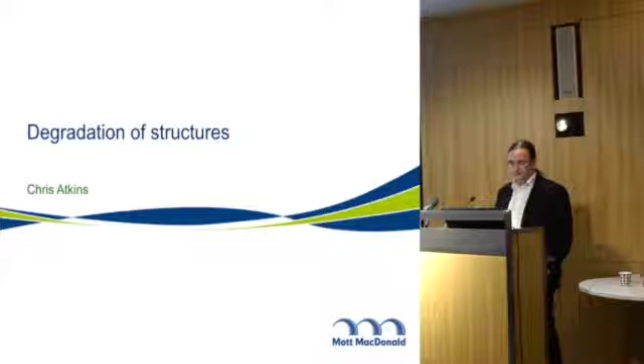First thing to know, concrete is a great material. Structurally it works, it's durable, it can last a long time, you get the impression that nothing really goes wrong with it. Wonderful stuff, but functionally it cracks. Structurally it has to, that's how it transfers load into the steel. We know bits can fall off because that's why I have a job.

It can also be attacked by chemicals. We think of it as an inert lump, but to be honest, it's alkaline, and when you chuck acid stuff on anything alkaline, it reacts. There's a couple of other things that can happen too. And the commonest thing I have to deal with, we put steel in it to cope with the cracks, but the steel rusts.

To carry the loads in concrete, it cracks. A lot of the early reinforcement designs we have are basically there to control the size and spacing of the cracks. That's kind of what they're there for.

Typical design code used to be make the cracks less than 0.4 millimetres in width. Wonderful. If you want a water retaining structure, you make the crack less than 0.2 millimetres width. The Euro codes have changed all that, so there's a whole range of other things you have to consider, but that kind of worked for a very long time.

The other thing concrete does is crack where you don't want it to. We come across designs that have come up with spacings for joints that are rigorously applied, and we'll have the joint here, here and here, and then they get confused when it cracks somewhere else. You don't tell the concrete where it's going to crack, the concrete will crack where it's going to crack. So they might not happen where you expect them to happen.

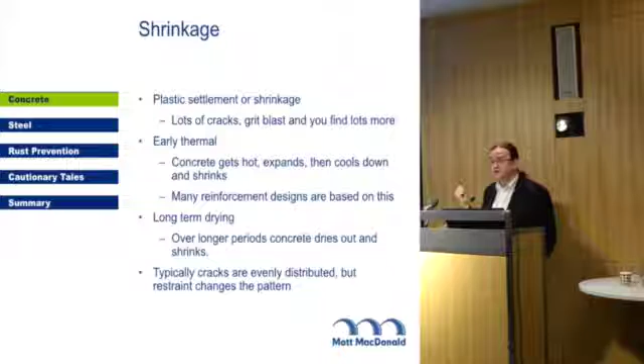If you come across cracks on site on a fairly freshly poured piece of concrete, first thing to do, give it a light grit blasting, because then you'll actually realise the true extent of the cracks. If you can see one or two, there's probably hundreds of them. So before you set out fixing hundreds of cracks by a method you thought would be cheap and simple and just involve injecting one, grit blast it. Find out how many cracks there are.

Early thermal cracking is cracking due to early thermal effects. Basically, concrete going hard, chemical reaction, gives off heat. So it gets hot and expands. Then it goes hard and cools. And as it cools, it shrinks. And as it shrinks, it gets tension in it. So you get cracks. And a lot of reinforcement designs are actually based on this.

It's kind of handy when you come to fix a motorway pier, because it means, yes, you've got lots of corrosion, but structurally it's not that significant because we put a lot of steel in to cope with the fact that it was hot and then got cold.

Long-term drying shrinkage is shrinkage that occurs over long term due to drying. Basically, stick concrete in an environment, it'll dry out and reach an equilibrium with the surrounding area. If the humidity around it is low, it'll shrink a bit more than the UK.

Typically the cracks will be nice and evenly distributed, because it happens uniformly over the structure. But if it's fixed in one place because there's a lift shaft there or there's a corner of a slab it's tied into, it's going to change it around a bit.

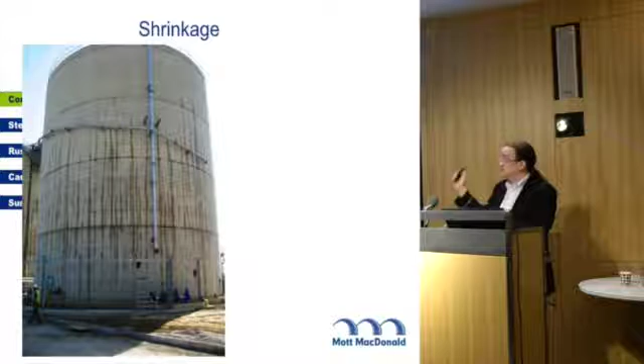In this case, concrete occasionally does a very useful thing called autogenous healing. The cracks self-heal with a bit of time. We measured them all, they were all in requirements with the design code. The autogenous healing basically filled them up, and after a couple of months with water sat in it, it stopped leaking.

So they divided it into nice 35 metre lumps, putting a joint every 35 metres, which meant that the extra 0.15 theoretically is a free floating corner of the building and a free floating edge. It's not going to work like that. There's no way on earth that that is going to be a separate piece of concrete behaving independently to the rest of the building, and that joint is going to move 75 millimetres in 3 dimensions. So you need to have a bit of a think when you're doing things.

In this particular structure, they had joints running up the middle of columns with reinforcement links going across the joints, and it's not going to move like that. So don't forget, trying to design the joints to cope with the middle of a column suddenly moving 75 millimetres out isn't going to happen. You need to have a bit of a think.

Plastic settlement - basically concrete settles down when it's wet. You can spot where all the reinforcement is. Durability-wise, that might be a problem.

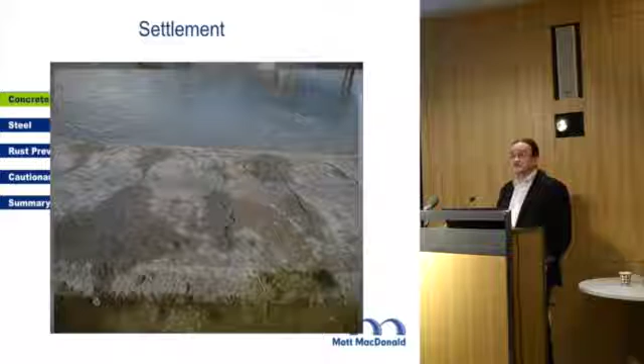This is a structure up in Scotland, a water retaining structure, and you've got the same kind of thing. The bars are basically immediately underneath the cracks, which means the bars aren't in nice friendly concrete anymore - they're basically in the water that's collecting in the cracks. So they're probably going to give you a corrosion problem, and you need to do something about them.

For chemical attack, it's either chemicals on the outside going in, or chemicals on the inside kind of mucking up the concrete anyway. Concrete's alkaline, so acid attacks it. Concrete's got a load of calcium in it, so soft water attacks it - soft water likes having more calcium in than it's got. The one we worry about for concrete in the ground is sulphate attack.

Internally - civil engineering naming terms again - alkali aggregate reaction is a reaction between the alkali in the cement and the aggregate. It can be called alkali silica reaction if you've got silica aggregate, or alkali carbonate reaction if you've got carbonate aggregate. Delayed Ettringite formation is a delay in the formation of Ettringite. So again, we're showing our commitment to innovative names.

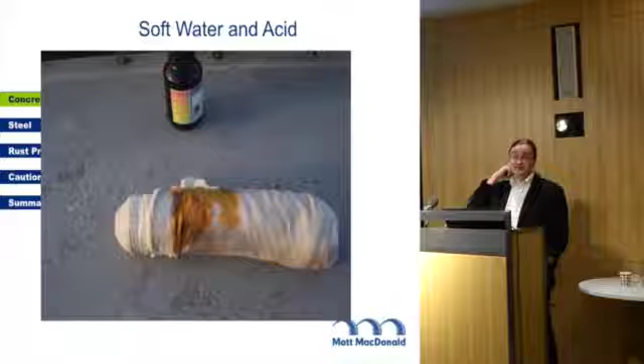That's a GRP lid. What that does - the smell in sewage is hydrogen sulfide, which happens when you digest sewage. If you put a lid on the tank, the hydrogen sulfide collects on the underside of the lid. There you get oxygen-reducing, sulfur-oxidizing bacteria that react with this hydrogen sulfide and turn it into sulfuric acid of about pH 1. Net result, you lose about 10 millimetres of concrete a year. Durability-wise, that's fairly bad. In this case, it was on 110 mil wall thickness, so they get to the steel in about 3 years, and get through the entire wall in about 10, because they put a lid on it to please the neighbours.

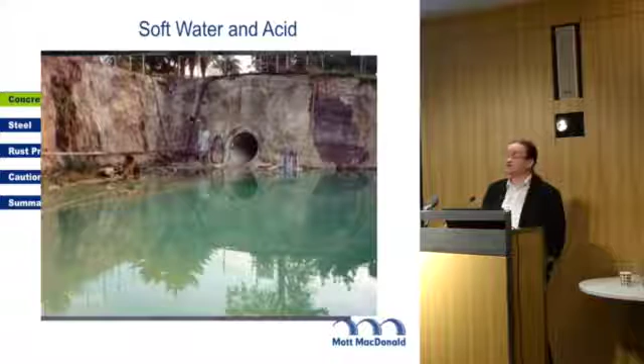Estoril interceptor sewer. If you were a public works engineer in Portugal in the 60s, you'd look at your local population, think 10,000 people living here, and design a sewage system to cope with 15,000. Then cheap flights came along and all of Northern Europe descended on Portugal for 3 months of the year because it was nice and warm and sunny. Suddenly you've got a population of 1 million pooing into a sewage system that can cope with 15,000 people. There's only one place it can go, and that's into the ground. So the groundwater for this interceptor sewer was around pH 1 due to microbial influence effects, which means the concrete sewer had to be lined with epoxy inside and out, because otherwise it would just dissolve all the concrete we put in the ground.

Alkali aggregate reaction - alkali in the cement reacts with aggregate. Typically it's silica as the aggregate that causes most problems, and that's called alkali-silica reaction. Something to note is glass is actually a reactive aggregate - if you put glass into concrete, it dissolves.

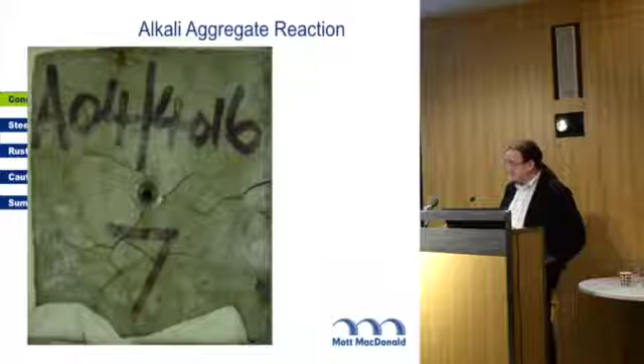If you want to make alkali-silica reaction, take some glass, stick it into concrete - that's an example the BRE did. Typically, alkali-silica reaction looks something like that, a 3-leg crack. If you've got structural restraint, it can't crack like that - that gets pushed together.

When you come along and you've got a post-tension structure, it cracks linearly. It's still alkali-silica reaction, but everybody got very confused because it didn't have 3 legs. The post-tensioning is basically compressing it, so it can't crack like that.

Delayed Ettringite formation. Sounds like I've been a bit cleverer with the name, but Ettringite is something that happens when cement gets produced, and when you cast concrete you get Ettringite. Delayed Ettringite formation is when the formation of Ettringite gets delayed. Normally this is because the mix has got too hot during the curing process. If it gets above 70 degrees C, you muck up the cement reactions a little, so it gets delayed, and you get cracks.

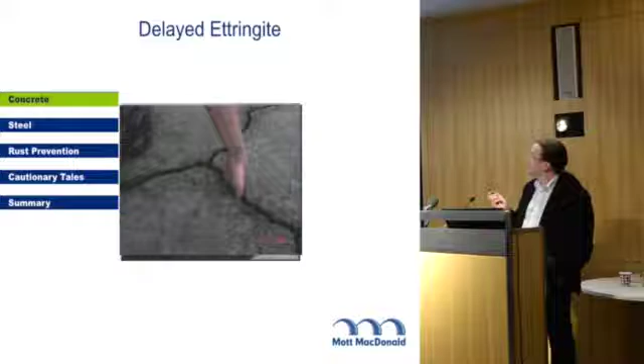That's the chemical stuff. There's also physical attack. Salt recrystalisation: salty stuff soaks in, dries out, you get a load of salt behind. More salty stuff soaks in, more water evaporates, leaves the salt behind. Eventually it just scales the surface off.

Frost basically looks very similar - the water soaks in, freezes, gets bigger, and slops the concrete off. Currently it's kind of popular; we've got more frost attack than we used to have because we had a winter that was -10 to -14 for a long period of time.

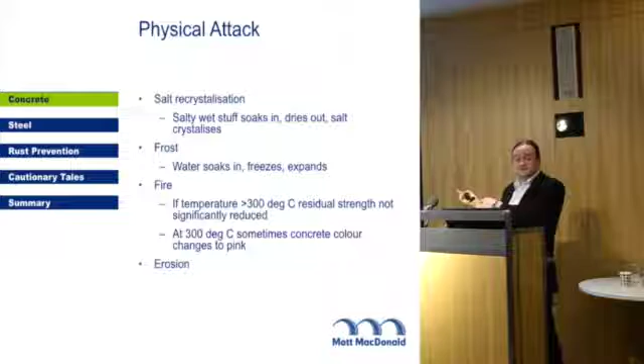Occasionally people set fire to things under concrete bridges for some reason best known to themselves. They burn cars out, and things burst into flames in the Channel Tunnel. Generally for concrete, I know it says if the temperature is greater than 300 degrees C the strength's not affected - actually that should be less than 300 degrees C.

At 300 degrees C, sometimes some concrete changes to pink. Doesn't always happen, so if you turn up at a fire damaged structure, knock a lump off, find it hasn't gone pink, it doesn't mean it's not got that hot. To be honest, if you get asked to turn up at a concrete structure that's had fire damage, it's had fire damage because that's why somebody's paying you to go.

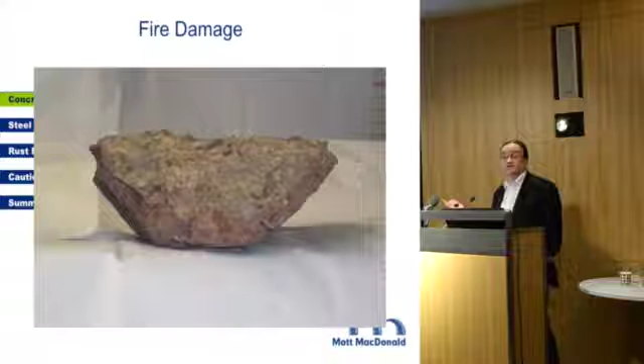Fire damage, break off a lump, go oh look, it's gone pink. But to be honest, most of the time when the concrete structure is degraded sufficiently to affect the strength, the concrete's fallen off. So then you're looking at what's gone onto the steel as well.

Typically we consider concrete to be hard and very robust and lasts forever, and if there's something wrong with it, it's because they've cast it wrong. But give yourself long enough, everything can be worn away.

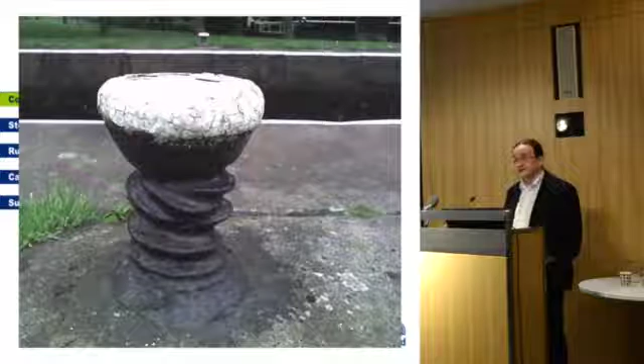And water can wear away concrete. This is a spillway in Afghanistan.

And basically, all of that is exposed reinforcement. Next bay along, again, that wasn't designed to be that shape. This is before we turned up, as you can tell by the safety hat and sandals approach to life.

There was a hole in this bit that we wanted them to investigate, so we said chuck a pole down. Couldn't find a pole, so they chucked an Afghan down. He's actually laughing his face off, because you can zoom in on the picture. He's swinging his legs around, and the report from site was he couldn't find anything to put his feet on, so it's probably quite a big hole.

That's important site feedback. Here you see some of the local aggregate that you basically have to use to make concrete.

So we turn up, we give them all PPE, so they're now much safer because they've got a hard hat on and wellies and overalls, and we try and produce a repair spec.

In this case, the client wanted the repair to be best quality. It's a bank-funded project, so we want it to be repaired to the best standards we can. We'd love to use a proper concrete repair mortar that's been certificated in accordance with the European standards.

But it's in Afghanistan and they haven't got anything. So it's going to be a case of accepting what they've got and working out a way of getting it to work. And it works perfectly well, but you can't just waltz in and say, right, we need to do this and this and this, because the skills and the equipment and the materials might not actually be available.

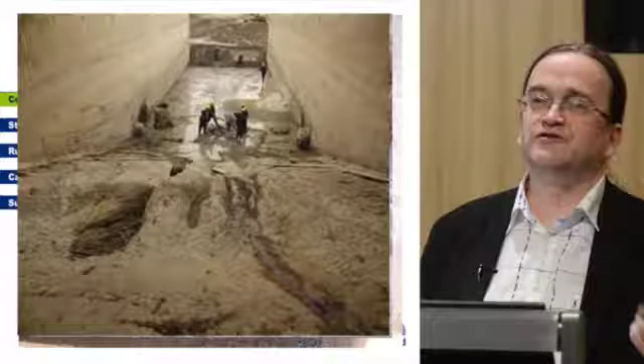Mechanical damage. It's surprising how often people drive into bridges. It really is. More commonly, people drive into parapets.

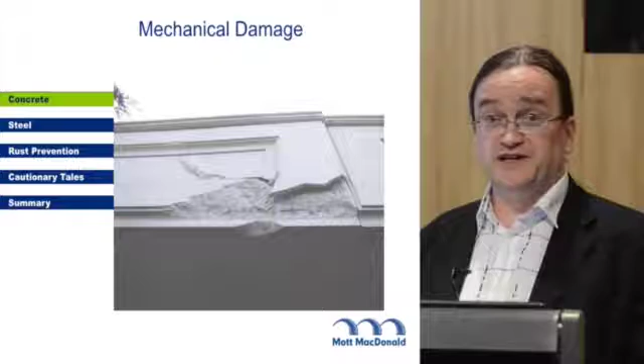For the structural engineers amongst you, this is what happens when a car hits a relatively young parapet. This is a 1990s car park, in the days when we realised that basically parapets are there not to stop people from walking off the edge, but to stop idiots from driving off the edge. The BMW that hit that suffered slightly more than the parapet did.

In the 60s, we didn't have that same approach. We thought parapets were there to stop the wind blowing through and give you some kind of edge protection. So when a relatively modern car hits a relatively old parapet, these planks, which are basically secured to the columns with 4 bolts, it's not that hard to drive straight through them.

We looked after this particular car park for 6 or 7 years, and it's quite interesting because this happens every 2 years. And based on the number of spaces in the car park, that's basically 1 in 2 million cars that goes into this place makes its own exit.

Now it's 40 quid for a morning to park there, so I can understand why, but if you're going to do it, don't do it on the 5th floor. You've a better chance of survival if you do it at a lower level. But yeah, it's a remarkably reproducible event, is people driving through the edge of car parks.

All that's well and good, but most of the time what I deal with is rust. And to understand fundamentally why things rust, you need to look at where steel comes from.

And where steel comes from, it all starts out with a big BANG, and the universe was created. Things were a bit chaotic for a while, but eventually we ended up on this lump of rock orbiting the sun 93 million miles away, and a chunk of this lump of rock is made out of brown mud.

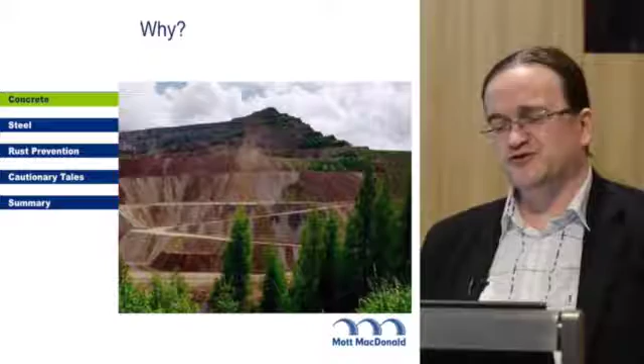Structurally, brown mud, not brilliant. You can make piles out of it, but you're kind of limited when you want to make a skyscraper out of it. You can make pyramids out of it if it's hard enough, the Egyptians did that, but you can't get many shops in the bottom of a pyramid because most of the wall is structural. So somebody realised that brown mud was good if we could stick a load of energy into it.

And as with anything, if you stick a load of energy into it, and in this case you make steel, it wants to lose the energy as quickly as it can. It wants to go back to its natural state. That's the way things work.

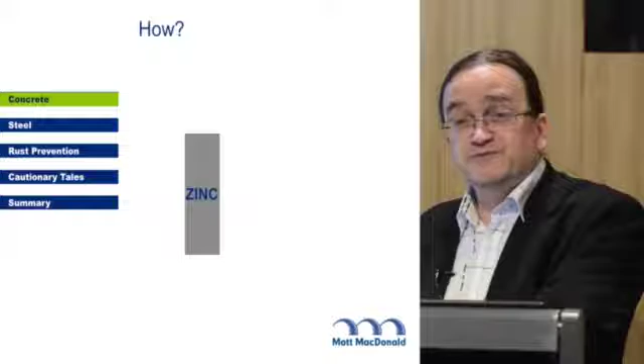How it gets there, here's where we come on to the electrochemistry. Electrochemistry, combination of physics and chemistry. Physics in school was the stuff that didn't work, chemistry is the stuff that smelled, that stank. So if you meet someone who claims to be an electrochemist, think doesn't work, smells, and you're probably not far off.

Basically, take a piece of zinc and a piece of copper, stick them in salty water, nothing happens. The zinc sits there being zinc, the copper sits there being copper. But along with zinc having a density, a tensile strength, a coefficient of thermal expansion, when you stick it in salty water, it has a voltage.

And zinc's voltage is -1. It's basically the Barry White of the voltage world. It's sitting there going, yeah baby, right down here. Copper's voltage is +0.2, so it's up here. And copper is Jimmy Somerville.

That's fine, they're quite happy like that, merrily being zinc and merrily being copper. Connect them together with a wire, the zinc sits there going, hey baby, what's all this positive stuff? And the copper sitting there going, you're far too negative. So it starts chucking negative things at that to try and bring it down, and it starts accepting negative things from that to try and bring that up.

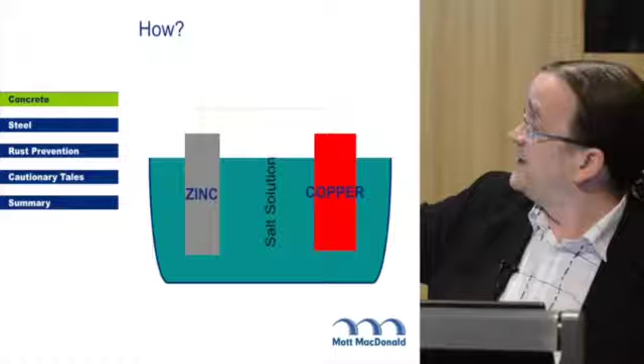The way it can throw negative things, the only negative thing it's got is an electron. The electrons, it can make that by dissolving. So it chucks electrons up there and dissolves into zinc ions in solution. That bit, electrochemically, is called an anode. The anode's the bit that loses metal. It's the one that's at a lower potential.

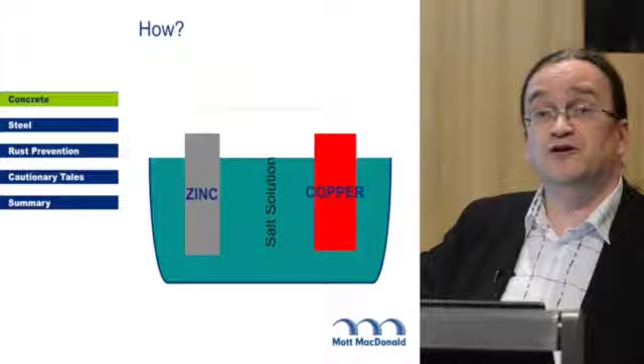The copper's the cathode, it's at a higher potential. It takes the electrons, reacts with oxygen and water, generates alkalinity, and you get electric current. That's what you get out of a battery. If you take the water away, you haven't got the potentials anymore, so you don't get corrosion. Dry things don't rust.

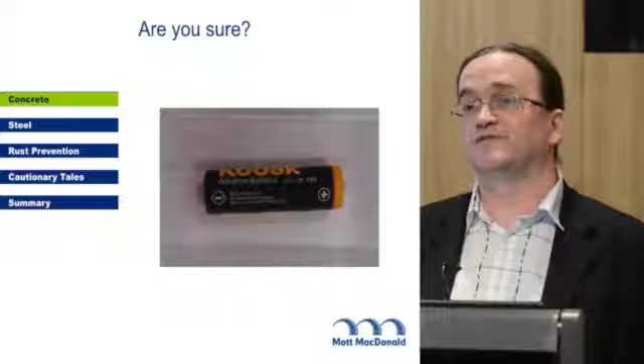That sounds all a bit, okay, I'll listen, but I'm not entirely convinced. This is a battery in a bucket on my desk with something called phenolphthalein in, and phenolphthalein goes pink when there's alkalinity being generated. So we drop that into water, and basically we can show that there was a big plume of pink came from that end, and then it starts heading towards that end. So we've got alkalinity being generated.

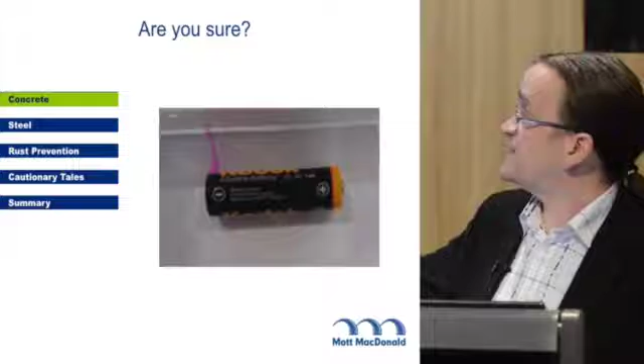Alkalinity is an ion, and the ion starts moving towards that end because that's covered in negative stuff, that's covered in positive stuff. So you get current flow through the solution. If I'd left it long enough, that end would go brown and rusty and dribbly, but to be honest, I get bored easily, so I didn't.

So steel rusts, it always will. How it gets there is anodes and cathodes. Steel in concrete, to be honest, if it always rusted, when Hennebique came along with his great, wonderful idea for a reinforced concrete system, if it all started falling to bits after about 5 years, we'd be sat there going, that was a bit daft, wasn't it?

Most of the time, steel in concrete doesn't rust because it gets this thing called a passive film on it. Yeah, we've stuck loads of energy into it, and yes, it doesn't really want to be steel, but we've given it a nice warm alkaline blanket where it sits there going, I can't be bothered changing back into rust, I'll just sit here merrily being steel. So it gets this nice thing called a passive film on it.

Two problems. Salt punches holes in its nice warm blanket and makes it rust even though it's still alkaline. Atmospheric carbon dioxide is a bit acidic, so it soaks into concrete, that carbonates the concrete. Instead of the steel being in nice cosy alkaline concrete, it's in mildly neutral tap water, so it starts to corrode.

The steel rusts, we lose reinforcement. Structurally, not great, because we put the reinforcement in for a reason. Rust is bigger than steel most of the time, so bits fall off. The bits falling off is useful. It's not great if you get hit by a bit falling off, but it means you've got an early warning sign that the steel is rusting. If bits didn't fall off, basically the steel would corrode and the structure would collapse and you would have no early warning of it. That would be bad.

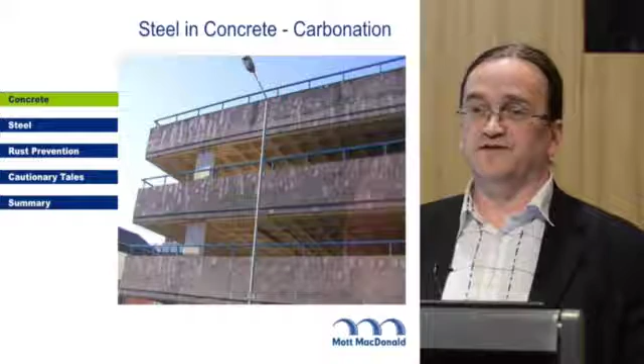Concrete's all uniform, cover's all uniform, atmosphere's all uniform, so it all carbonates at about the same rate. Every bit of steel that's in concrete that's not alkaline anymore rusts, so the repair's quite extensive but quite easy to do.

This is another car park structure, this one's in the northwest. The client knew they had a problem because bits were falling off, so they wrapped it in nets. Temporary measure, fine, nothing wrong with that. The tiny problem was they didn't do anything with the nets.

So after about 10 years, the steel carried on rusting because the nets didn't really stop that. And so rather than having bits of concrete hitting members of the public, you had nets full of concrete hitting members of the public - not entirely the solution they were after. If you do something temporary, please bear in mind it's temporary, keep an eye on it, and do something about it.

Chlorides are slightly different. Basically, a common problem in the UK: bridge beams under a joint leak, salty water gets on the crossbeam. All of that is full of salty water, but only about 10% of the steel's corroding, because that's what chlorides do - 100% of it's in chloride concrete, 10% of it's where the rust comes along.

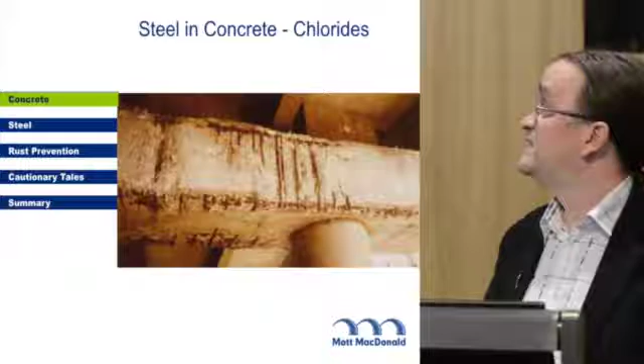Similar kind of thing, this is up in Runcorn. There's a joint above that. Basically, it's leaked throughout its entire life. That bar's probably not doing much structurally. Nice spacing of the links for anyone who's doing modern designs. We've got little architectural features to make sure we got 10mm less cover than we needed. And so the steel rusts.

Closer to this part of the world, M4 elevated. Basically, we've got a motorway dynamically carrying people into the west end of London because they're posh and need to be raised above the hoi polloi who deal with the A4, immediately next to houses. We've got half joints. Half joints made it cheap to build. From my point of view, they're great because it means they leak - all the salty water collects on that shelf and you can't inspect it and you can't see what's going on.

You just know that's probably going to be the worst bit of the structure. So from a concrete repair point of view, it's a pain in the neck to fix - a great plan for consultants to sit there and scratch their heads and wonder what to do with it.

On this one, somebody felt bad when they were building it. It's kind of like, well, okay, we've got to stick a motorway through the middle of a housing estate, but let's give them some credit - let's put the drain pipes on the inside of the column so they won't have to look at the drain pipes. And I, for one, am much happier looking at a motorway if I can't see the drain pipes immediately out the front of my house.

Drains block within about 3 months, so the concrete gets soaked from the inside out with chlorides, and we get bits falling off, and we get anodes and cathodes forming.

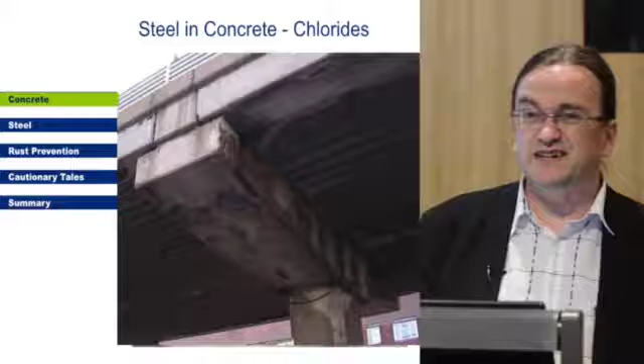Up until about 10 years ago, everybody just thought it was in situ concrete, because pre-stressed concrete gets built in a factory - it got built in a factory in the 60s and 70s, okay? For those of you who don't remember cars built in the 60s and 70s, just because they were built in a factory didn't mean you wanted to waive your RAC membership, because, to be honest, at some point you'd be on the hard shoulder of a motorway. For those too young to remember, Top Gear did an episode highlighting the quality of British cars built in the 60s and 70s.

It's built in a factory with improved quality assurance, so we're not going to have a corrosion problem - we've got higher strength steel.

Higher strength steel stops rusting normally, and you get this thing called hydrogen embrittlement, which I'll talk about more later. Here's an example of a recent repair project where we did a breakout on a pre-stressed beam and found there was a hammer that had been cast in at the factory.

So yeah, better QA needed. It turns out we started using pre-stressed concrete en masse about 20 years after reinforced concrete. For everyone under 40, when you hit about 40, that immortality of youth starts fading, you get a bit spready and things ache. That's life, and it happens to pre-stressed concrete as well as in situ.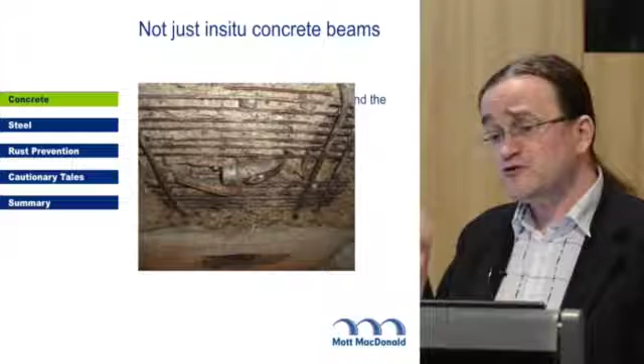But that's all right, because the Europeans have come up with a standard, including the British - we are in Europe after all. It's called BSEN 1504, and it makes the radical suggestion that step 1 is to find out what's wrong with your structure before you fix it.

That was highlighted by a study done about 10 years ago that showed 95% of attempts to repair concrete fail within 3 years. Because rather than finding out what's wrong, we see a bit of concrete falling off, turn up with some stuff in a bucket and slap it on the hole. That doesn't work. So now we find out what's wrong, then design the repair, then fix it, and keep records and maintain it, because everything only has a finite life. Nothing lasts forever.

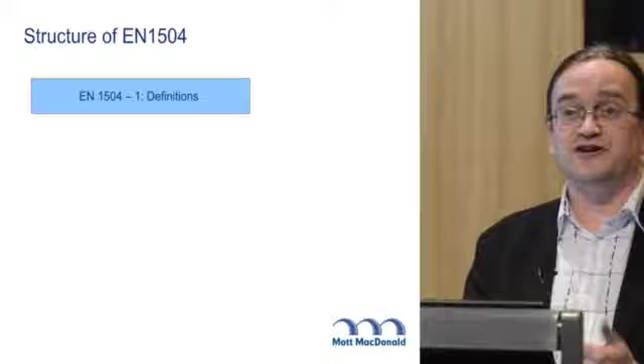1504 is a bit of an odd thing. Part 1 is definitions - you'd think that was a good place to start, but it's like reading a dictionary written in English, German and French, translated into three languages and agreed by committees. So we've got definitions in part 1.

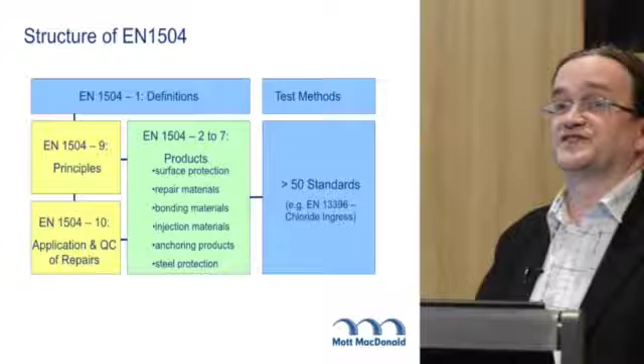Products - basically coat stuff, stick stuff in holes, glue stuff, inject stuff, anchor stuff and protect steel - that's in parts 2 to 7. They're really for the manufacturers. Principles is the one that tells you how to go about fixing things and what the investigation procedure should be. Contractors are covered under part 10, which says what QA you need to do on site. Then there's a bucket load of test methods that the likes of Sika have to get their products tested to before they can get a CE marking, so they can sell anywhere in Europe with a similar basic level of quality. And part 8 is how the likes of Sika control their quality assurance.

Don't go onto site, look up BSEN part 3 on repair materials, find there's 200 things it needs to be tested for, and ask the contractor to test it on site. All of that's covered by the CE marking.

These are the principles in part 9. Starts off well - we need to stop the concrete from getting worse, so we'll stop stuff from going in. So, protect it against ingress. Coat it, basically. But we need to control the moisture - how do we do that? Coat it. So why is it separate?

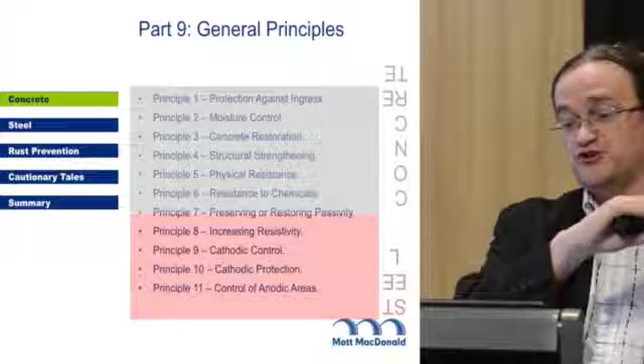Concrete restoration, okay, put stuff in holes. Structural strengthening, straightforward enough. Physical resistance - not really much you can do to repair a structure to make it more resistant physically, other than put more structure around the outside of it. Resistance to chemicals - surely that's protection against ingress. So it gets a bit loopy and strange at times.

But because there were 6 principles on fixing concrete, we're going to try and get to 6 on fixing steel, and we don't quite make it. Preserving or restoring passivity - that's basically taking chlorides out, removing carbonation. Increasing resistivity - the only way you can do that on a structure is dry it out. But we want it separate to moisture control, because we're dealing with the steel.

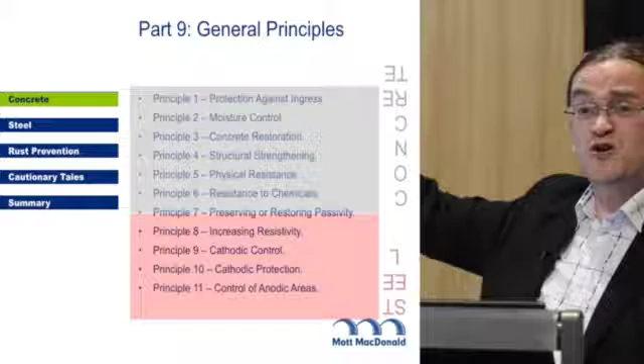Cathodic protection I'll talk about later, and we can control anodic areas with things like inhibitors and protective coatings on the steel.

First step, find out what's wrong. Is it rusting? Can you see any rust? That's the first step. Bear in mind the seawall from Dubai, it wasn't a rust problem, so you do need to know what you're looking at before you turn up and fix something. Easiest way is visual inspection, but we can also test.

We can test for carbonation, we can test for chlorides, we can measure the cover to the reinforcement, we can actually measure potentials, these anodes and cathodes that form, with a surface probe. Need to think a bit about the results, and we can quantify how much it needs repairing by hitting it with a hammer - that's a delamination survey. We can either do this on the surface or at depth. So we can look at the face of a half joint that we can't see by drilling into it and collecting chlorides and half cell potentials through depth.

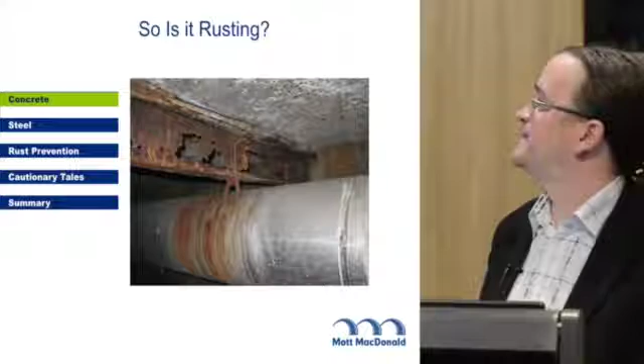Phenolphthalein doesn't dissolve in water, it's a white crystal, so you dissolve it in alcohol, so it's a bit flammable. So you get a big cross on the COSHH assessment saying you need to be careful with this, but we're only using drops at a time rather than spraying gallons of it liberally.

One of the reasons we're not spraying gallons of it liberally around is because it's a laxative. It used to be the active ingredient in laxative chocolate bars at a concentration of 0.05%. The stuff we use is about 1% to 2%. It's not a comedy, 'ooh, I feel a bit unwell' type laxative at 2%. It's an end-up-in-casualty-with-a-tube-coming-out-your-arm-and-a-bucket-underneath-you type laxative. So always wear gloves and always wash your hands.

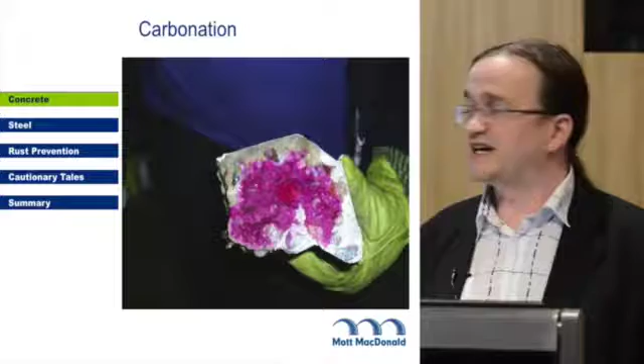Because of its toxicity and issues, some people would like it banned. The alternative is something that goes from greeny blue in alkaline concrete to bluey green in non-alkaline concrete. As a site test, it's probably not that practical compared to clear pink.

For chlorides, sorry, but we're going to have to drill a hole. And it's easy enough - devilishly handsome engineer, drilling a hole with a whisper quiet drill. Basically, find the steel, because if you want to take a sample beyond the steel, you don't want to hit the steel. Drill a hole, ignore the first 5 millimeters of the hole, and then you collect the dust at depth increments. Send the dust off to a lab for analysis, and you can measure cement content and sulphates.

Cover meter: use it to find the steel, write down the lowest number. Basically, you have to wave it about a bit.

Hilti do one called a Ferroscan. It logs as it goes, and you collect loads of data - it can give you bar sizes, spacing, and the variability of it. It's only an indication of bar sizes though. Structurally, if it really matters that the bar's got to be a 30mm bar, break some out and measure it, because the Ferroscan's great but it's give or take a bar size. Hilti also do an X-Scan, which is a ground penetrating radar handheld device that can go in deeper than the Ferroscan.

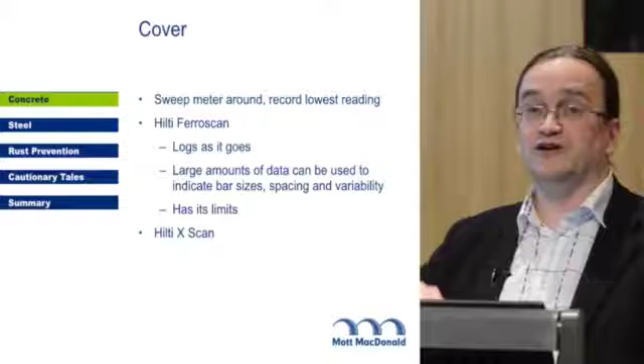Half cell potential, also known as reference electrodes, we measure the voltages. And because we know the voltages associated with corroding steel, we can work out where it's corroding. There is guidance on the readings, but they were based on 6 bridge decks in Florida and then universally adopted across the entire world. They work most of the time, but some half cells don't work upside down, so if you're doing a soffit, make sure you've got one that works that way up. If you've got galvanised metal, it'll be around -900 because that's what zinc is. And because more negative indicates an anode, people get awfully excited when you get negative readings.

It could just be there's a zinc post bolted into the concrete. Also, if you get down the bottom of a wall or an abutment, because there's not much oxygen kicking around on the buried stuff, the potential of the steel drops as you get down there. So it goes more negative anyway, even if it's not corroding. And what we're looking for is higher or lower. We're looking for Barry White and Jimmy Somerville, and Barry White's the one that's corroding. Because we're just looking for higher or lower, we don't always need to connect to the steel.

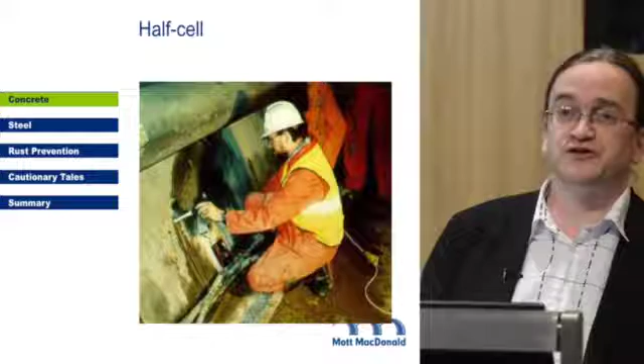And there's my boss doing a half cell survey on the interior of a tunnel. If you ever get to do that, the important thing to find out before you drill the hole is how thick the tunnel wall is. Otherwise you're going to get wet.

And there's him doing one on the surface of a deck in the days before adequate traffic management, where the health and safety approach involved keeping an eye out and being prepared to drop everything and run when you see something coming. This was during a tunnel closure, but the owners of the tunnel had two parallel tunnels, so they'll shut one, and the police would occasionally use it to drive up and down for a laugh, just to keep you on your toes.

Hammer survey: hit the concrete with a small hammer and write down where it sounds hollow. Small hammer is important, not for any particular inspection or repair reason, but because you're going to be doing that for the next 8 hours.

And your natural tendency is to use the big hammer, because you want to look like Thor on site, including shiny breastplate and flowing locks. That's who I model my hero on. But you're better off with a little one, because with a little one you'll be able to do it for more than 10 minutes without hurting yourself.

Sometimes it sounds hollow when it isn't, and sometimes it doesn't sound hollow when it is. So when it comes to actually repairing it, there will be some variability between what I have marked out as needing repair and what actually needs repairing. It's a fact of life, and as long as you've got a proper bill of quantities, you can measure it and work it out. That's concrete.

Steel, basically, whether you stick it on concrete or not, when it corrodes, you get anodes and cathodes forming on it. You get little Barry Whites and little Jimmy Somervilles all over the surface.

If we take this lump of steel, stick it in the ground, bury it for a while, then dig it up, that side looks basically rusty. Everybody thinks of that as corroding. But if you grit blast it, you find you've got bits where the metal's gone and bits where the metal hasn't. And you've also got a little sad face down here. So you've got anodes and cathodes forming on the surface of the structure. It's not just me saying it, it happens, look.

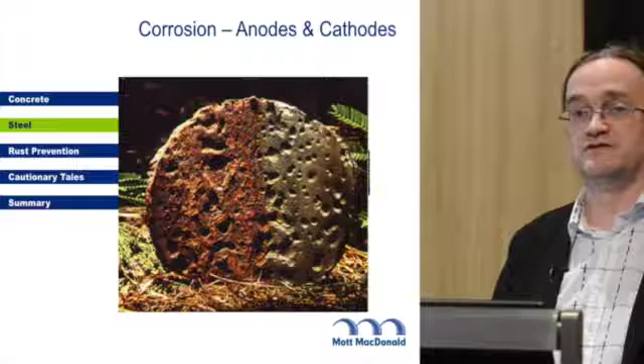There's a couple of different types of corrosion worth mentioning. General corrosion: basically the anodes and cathodes wander about the surface, so you get a fairly uniform attack. You don't get many holes forming until the metal's completely gone, but you do lose quite a bit of section. So structurally, the fact that there isn't a hole in it doesn't necessarily let you off the fact you've lost 2 millimetres off the perimeter of your beam, because that can be a significant amount of metal.

Because that's the type of corrosion that's been kicking around since we've been putting steel in things, there are typical rates available for most metals and environments. So you've got steel sheet piling corrosion rates if you put the steel sheet pile in the sea, or in the river, or in the ground. They don't always work because they are typical rates and there are occasional exceptions.

How you deal with general corrosion: you keep the water out. That's what paint's for, just to keep the water off so you haven't got anodes and cathodes forming. Or you design out poor details that you can't inspect and are designed to collect water and debris, then lead to premature failure. For example, this particular car park, built in the last 10 years, we've got a channel, and the channel has been put that way up so that it collects water and debris, guaranteed to make it rust. And then we've bolted cladding to that face of it so we can't actually inspect that face.

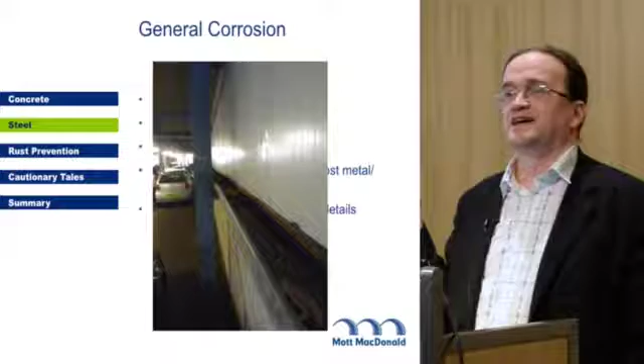And we've got a crevice forming there, and a crevice where that's attached. So we don't do that, even though this is 10 years old. If they'd stuck that the other way up, totally different kettle of fish - much better from a corrosion point of view. Easy to manage. Easiest time to deal with it is in the design stage.

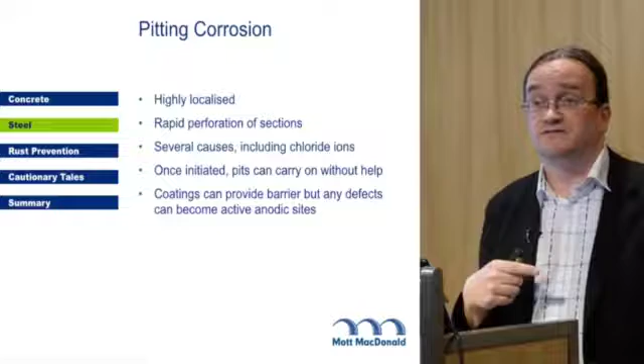Commonest cause is chlorides, and we're on an island surrounded by a big blue wobbly thing that's packed with chlorides, and we also chuck millions of tonnes of salt on the roads. Once initiated, they can carry on without any external influence - they can just get worse and worse and worse. How do we deal with it? Same way we deal with general corrosion - we paint it. But we might make pitting where we get holes in the coating if there's salt kicking around.

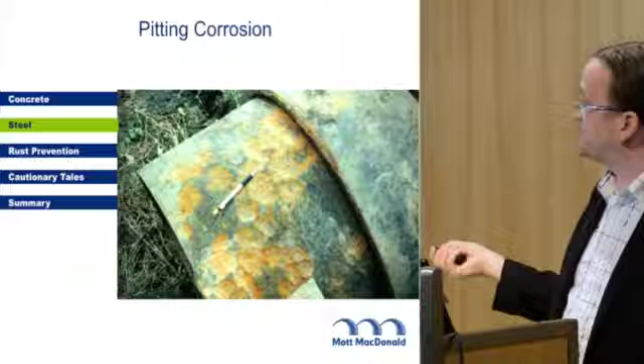There you go - pitting. Basically that bit's not really corroding, that bit's corroding. In this case, pitting, we've got a hole. This was a pipe that was coated perfectly acceptably in a factory, and then they used steel chains to drop it into place on site, which removed all the coating locally, which means you've got a corrosion site formed.

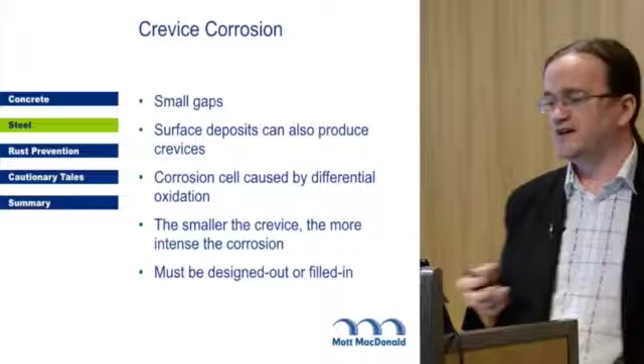Crevice corrosion - little gaps mean you get crevices. Crevices mean you've got more oxygen out here than you have at the bottom of the crevice. Sometimes just debris forming can give you a difference in oxygen. You get differential amounts of oxygen and you get lots of intense corrosion in a very small area, so you lose section loss in a very localised area.

Way to deal with it? Well, don't have crevices - try and avoid them. If you're welding something, don't do a hit and miss weld with gaps to accumulate stuff and have small gaps, or fill them in. There you go, that's where you usually get a crevice at a bolted connection, just where you don't want it, which means all the corrosion you're getting is concentrated there, which means that can pull out.

Bimetallic corrosion - bi, two metallic metals. If we connect zinc to copper, zinc's an anode, copper's a cathode, the electrical connection's there and we've got an electrolyte - that's just water. If we've got a big cathode and a small anode, the thing that governs how quick it corrodes is the amount of oxygen kicking around - the amount of oxygen that can be consumed at the cathode. So if you've got a big one of them, it can consume lots of oxygen, which means the anode can corrode as fast as it possibly can.

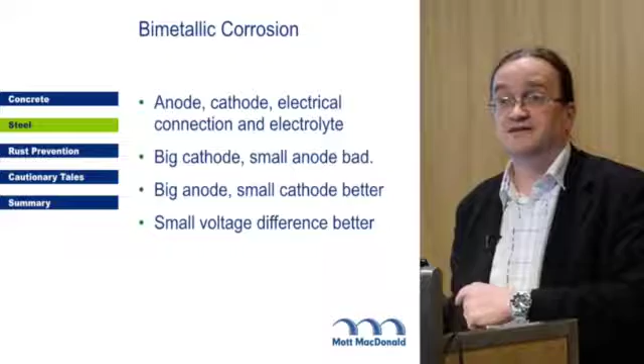If you've got a big anode and a small cathode, the small cathode can't deal with all the electrons that the anode wants to chuck at it, so the whole thing slows down. Small voltage difference is better than a big voltage difference. If you connect carbon to aluminium, you've got 1.5 volts. Duracell used to slag ordinary zinc carbon batteries off - that's a piece of carbon and a piece of zinc, that's how you get 1.5 volts.

That's a bicycle frame - a £4,000 bicycle frame made of carbon fibre with an aluminium seat post in it. So we've got about 1.5 volts in there, and that collects water. And the aluminium corrodes, and as the aluminium corrodes, it splits his £4,000 bicycle frame.

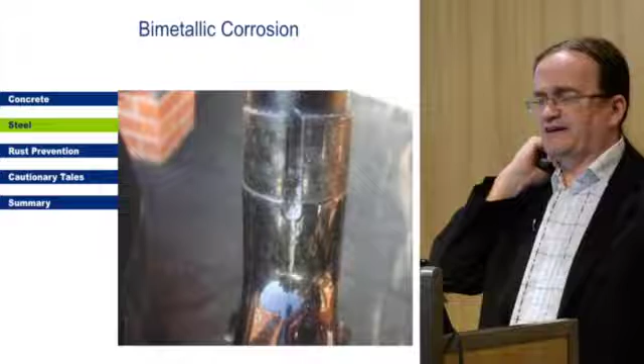He did take it up with the manufacturers, who weren't the most helpful and basically said, well, you didn't follow the maintenance procedures. Oh, what are they? Not telling you. What are you saying? You shouldn't have got it wet. It's like, hang on - I should ride a bicycle but not get it wet in the northwest of England. That's not going to happen.

One of the things that's becoming increasingly popular and increasingly worrying is something called stress corrosion cracking, or hydrogen-induced stress cracking, or hydrogen embrittlement, or any of those wonderful things. If you've got the right tensile stress and the right material and the right medium, you don't get normal corrosion - you get a tiny pit developing and then it snaps. That's bad - no warning, no obvious corrosion, snap, fail. As we get stronger and stronger steels, that's the world we're heading into.

Just because the bolt isn't loaded like that doesn't mean there's no stress. If you cut threads on the bolt, that puts stresses in locally, so that can give you stress even though you don't think there's stress there. If you've welded it, that can also give you stress even though you don't think there's stress there.

How do we deal with it? Well, the easiest thing to do is don't pick a stupid grade of steel, or don't put that particular grade of steel in that environment. But if you have to, then you can coat it, though coatings break down with time and need reapplying.

Here's a bolt that basically stress corrosion cracked and fell into a swimming pool underneath it. The owners of the swimming pool shut the balcony because they thought people were throwing things into the pool, but actually it was the bolts falling out of the roof. Not great if you're swimming along.

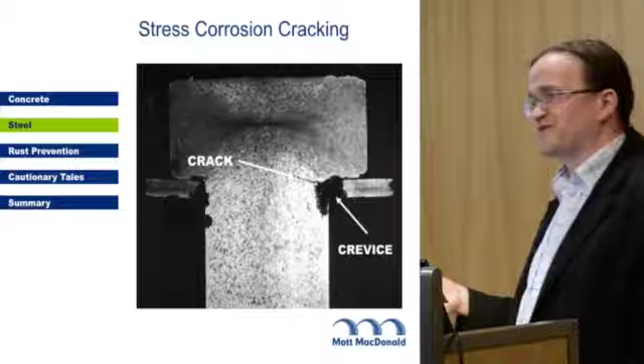Well, none that the site noticed. What happened? One of them, full of sewage, emptied itself fairly quickly. Nobody died, which is kind of good, but by the time this happened there were thousands of these things built all across the UK, and every water company that had built one went, oh, hang on. Mildly worrying - so it can happen, and it happens.

In this case we had high-strength steel tendons, and basically they got water on them, and they corroded and snapped. But when they snap, there's no warning - there's no ductility, it just goes ping and fails.

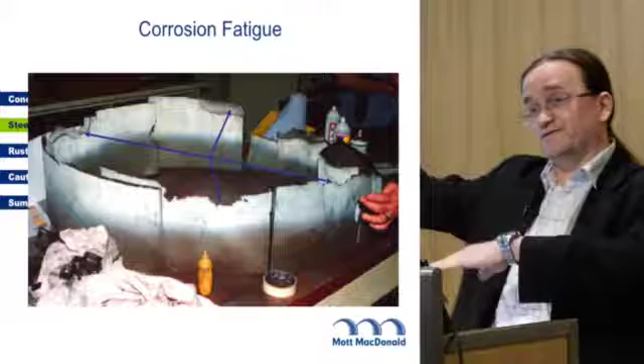Anyone who deals with fatigue knows there's a little side arm that corrosion engineers throw at you called corrosion fatigue. Cyclic stress plus a corrosive environment - cyclic stress gives you fatigue, corrosive environment gives you corrosion. It's kind of difficult to distinguish from plain fatigue, but there is one subtle difference: there's no stress limit. Normally, if you're not putting something above a stress limit, fatigue doesn't happen for steel. Aluminium's not the same - it doesn't have a stress limit - but for steel, as long as you don't put it into that region, it's not going to fatigue.

But because corrosion gives you little notches, little holes, little ductility problems and little stress raisers, locally you end up sticking it over that stress limit. How do we deal with it? Coat it. Anything we can do to improve fatigue resistance also helps, so we can put the surface into compression by shot peening it, carburizing it, or nitriding it.

And that's an example of something that basically corrosion fatigued off. It's a fan casing, and that's where the failure happened before it ripped itself to pieces.

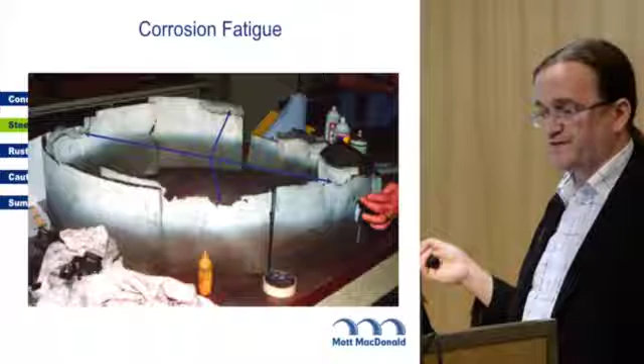Bugs - good. NCE had a wonderful article, early 90s, about steel-eating bugs causing havoc in ports.

They don't actually need to physically consume the steel because, as I showed on the sewage works before, they can change the environment quite significantly - from something relatively benign for concrete to something that's pH 1 and eats through 10 millimetres of concrete. The same thing can happen on steel. You can get little biofilms forming and multiple interactions, which means instead of having 0.1 millimetre a year loss of section, you've got 1 millimetre a year loss of section.

It kind of changes your design for the sheet piling slightly. That's caused by biofilms, and we can get massive corrosion rates. That's a picture I showed before of a sewage treatment works - that's a super duplex stainless steel pump, 10 millimetre wall thickness, in service for 6 months with a hole in it due to bugs.

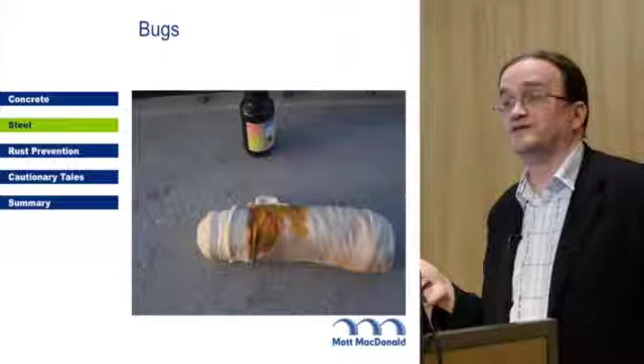This doesn't happen everywhere - you find it everywhere you look for it by giving the bugs the right type of food. It's like looking to see if you've got a stray dog by throwing a pile of burgers in your back garden. You suddenly find, yes, you've got a stray dog, so that must have been the problem. Well no, you've just chucked a lot of food down and attracted a lot of stray dogs.

To stop rust, you have a couple of choices. One, use something that doesn't rust - aluminium doesn't corrode generally, unless you put alkalinity on it, but you've got fatigue problems. Gold doesn't corrode, but you can't make a plane out of it because it's too heavy and it won't take off. So we end up using steel, which we structurally understand quite nicely, and we coat it.

Or we can galvanise it, or we can use something called cathodic protection, or we can use corrosion inhibitors. I mentioned passive films for steel in concrete.

Stainless steels basically do the same thing but in the atmosphere. There are lots and lots of grades of stainless steel. If you just stick on a drawing that you're going to use stainless steel, the contractor will do what the contractor does. It's his job to find the cheapest way of meeting what you've asked for. So he'll get a load of teaspoons, form them into something structural, and well, there you go, there's stainless steel. There's lots of different grades.

There's a perception that there is something called marine grade stainless steel. There isn't. Marine grade typically means 316. Occasionally people think 316L is better than 316. It's not. The L means it's got low carbon in it, so it's easier to weld, which if you're a welder is better, but it doesn't mean it's any more corrosion resistant.

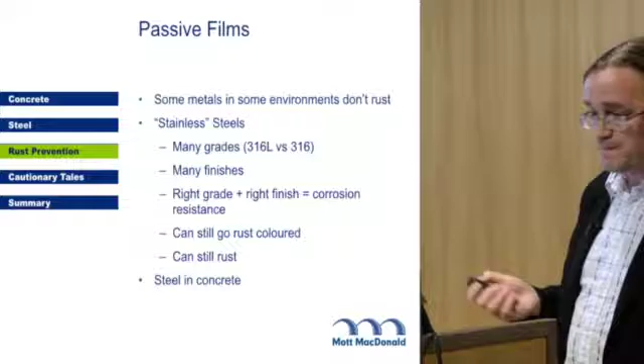Coatings are the same. You can't just say paint it and expect it to last 15 years. You need to get the right surface. It needs to be clean enough and it needs to be rough enough. Normally that's where abrasive blasting comes in.

Surface prep grades quoted as SA mean we are going to abrasive blast this. ST means we're going to mechanically prep this. You need the right coating.

And if we paint it and we can see it and it's above ground, that's easy enough. If we can't inspect it, then that's where cathodic protection comes in, because we can protect the steel pipeline that's buried in the ground by sticking a different anode on it.

Some coatings can cope with moisture, some can't. Cementitious coatings on concrete are great because you get the concrete wet to apply the coating, and that's a damn sight easier in the UK than getting the concrete dry to apply the coating. Epoxy coatings on concrete can cope with a bit of moisture. Urethanes on concrete, some can cope, some can't. Some turn into expanding foam as soon as you turn it on. Minor problem.

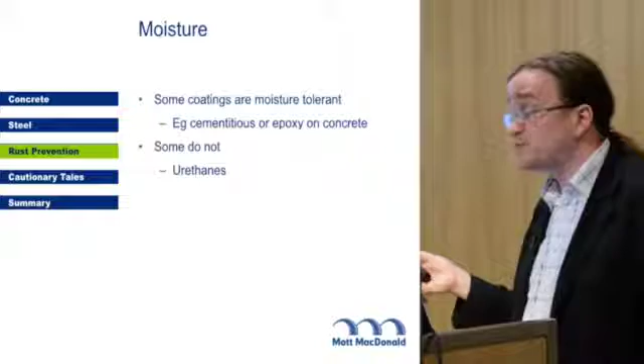A couple of different types of coatings. If it's chemically cured and you add part A to part B, and you add too much part A, you end up with leftover part A after it's gone off and a horrible sticky mess. If you don't add enough part A, you end up with leftover part B when it's gone off, and a horrible sticky mess. So you can't muck around with the proportions.

If it's a catalytic cure coating, add part A to part B. More catalyst means it goes off quicker, which means you can get winter grades. You can get winter grades of the chemical cure as well, but for catalyst, more catalyst means it goes off quicker. Doesn't mean you can do it on site. You can't open a tin and a half of part A, bung it in, and expect it to work like it would normally. Doesn't work like that, but that's basically how catalytic coatings work.

Solvented coatings is the way we used to do it. Basically solid stuff floating in something that evaporates. Paint it, stir it thoroughly, because otherwise all the solid stuff sinks to the bottom of the tin. Paint it on the steel, the solventy stuff evaporates, and the stuff that's left forms a hard protective surface. We don't like solvents anymore. They're bad for the environment, so we take them out of paint and we put them into hand gel. It's just a completely different thing.

There are lots of things that can go wrong with coatings. If you want an in-depth study of all of them, you need to be a paint inspector. If you never want to have to worry about any of them, you need to employ a paint inspector on any of your coating jobs. They are very useful things to have.

Favourites: spotting the difference between crocodiling or alligatoring, and ropiness. Holidays is paint-speak for a hole in the coating. Grinning through means you can see the old stuff shining through the paint you've applied.

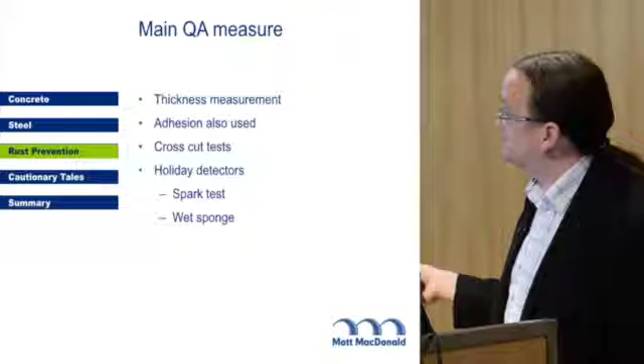Another way of doing an adhesion test is basically slashing the paint with a Stanley knife and sticking some duct tape on it - it's called the St Andrews cross test. It's slightly more controlled than I made it sound. And we can check for holes using a spark test or a wet sponge holiday detector - holiday being hole.

That's paint. Galvanising - in the same way there's lots of different types of stainless steel, there's quite a few different types of galvanising. Basically, zinc corrodes slowly, and when you get a chip, the zinc will act as an anode and locally protect the steel.

Electroplate gives you about 5 to 25 microns of zinc. Iodizing or sherardizing - basically you stick a bit in a tumble dryer full of zinc powder and you get 15 microns of zinc on it. Hot dip gives you 20 to 200 microns.

Don't sit there, look at that 200 and think 'every spec I write from now on is going to have 200 microns of zinc on everything,' because how much zinc you can physically get on something depends on the size of the thing you're zinc plating. If you hot dipped bolts, it wouldn't work, because all the threads would be full of zinc and there'd be no zinc left on the shank.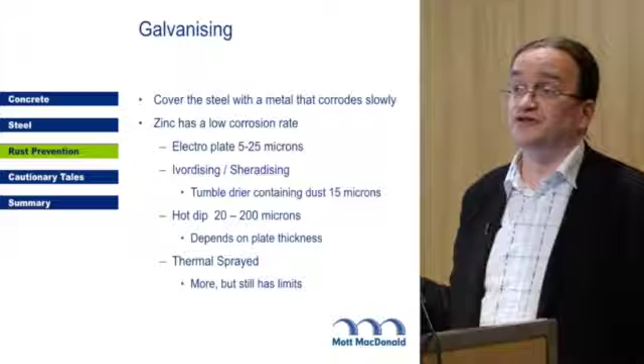So bolts are spun galvanised. It's thinner, but it's good enough - it's the best we can do. You can also thermal spray zinc and sometimes get more than 200 microns on, but it depends on what you're doing and where you're doing it.

Now for steel in concrete - basically when it gets full of chlorides, 10% of the steel corrodes, so 10% gets rust on it, so 10% of the concrete falls off.

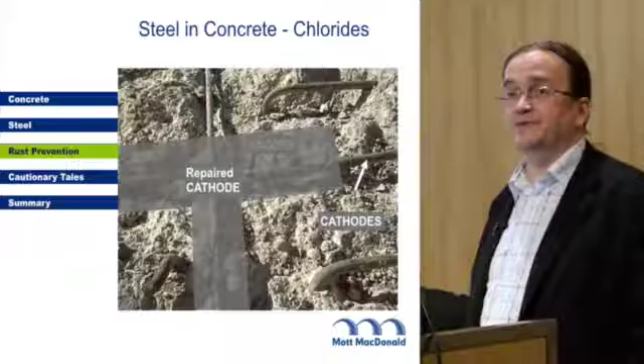Historically, you come along, tell someone you want that repairing, they knock off the loose bit and repair it. So that gets repaired - technically that's now steel in uncontaminated concrete, so it's actually quite a good cathode. But all the stuff around it is still full of chlorides, so it's a good anode, which means it comes along and rusts next to the bit you've just repaired.

Where cathodic protection comes into the game for concrete - all that chloride contaminated concrete, we can leave behind. On the M4 elevated section, we don't need to remove the piers and replace them at a cost of 5 million quid. We can CP them at a cost of 200 to 300,000, depending on access and traffic management and all those fun factors. So all the chloride contaminated concrete can remain, which saves propping and access.

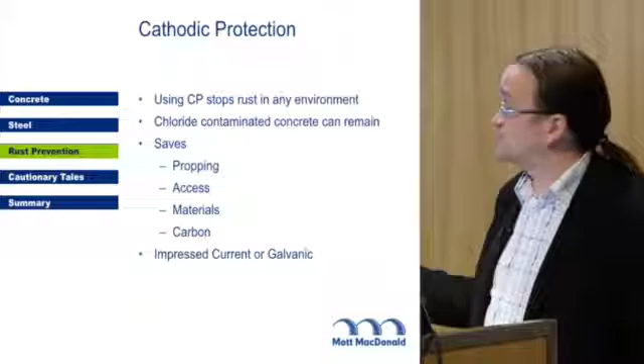It's not me being clever that costs money - it's actually physically getting to the work site, doing the work, and supporting the structure while you're doing it. So if you can save that, you save yourself a bucket load of cash. We also save materials, carbon, embodied energy, and all that good stuff. So it's the right thing to do sustainably, but it also works out cheaper, which is entirely the reason it's done, not because it's good sustainability.

Two versions: impressed current, where you get a 6 volt power supply, and galvanic, where you use something that's an anode to steel in concrete, zinc typically, which galvanically protects it.

For impressed current, that's a piece of titanium. There's a wire coming off the titanium to a 6 volt battery, another wire coming off there to a piece of steel that's in there, and it's generating alkalinity around the bit of steel. And the current's flowing through the solution from there to there. That's impressed current.

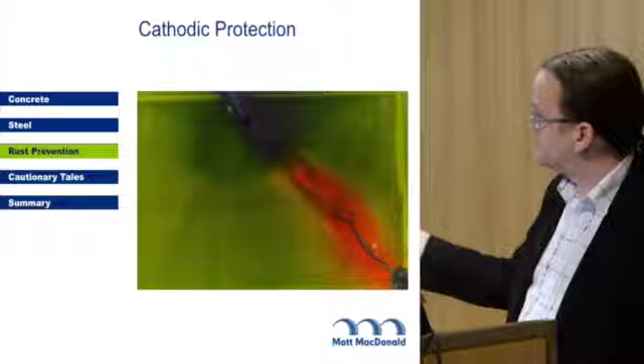For the equations, basically steel corroding: Fe goes to Fe2 plus and 2 electrons. Those two electrons are reacting with oxygen and water, generating alkalinity. We turn up, stick an anode on the surface, and ram electrons into the steel. That goes away, so it stops rusting. All we're left with is this alkalinity. So we generate alkalinity on the surface, and if it's corroding because it's turned acid through carbonation, we can do that for a bit. It's called realkalization.

That's covered in positive things because that's how it chucks electrons out. Because that's covered in positive things and chlorides are negative, they start heading over towards the positive things to balance the charge out. That's how current's carried in solution. That's called electrochemical chloride extraction. Not done much, but can be done.

And we can also move water around under the presence of an electric field due to electrochemical osmosis.

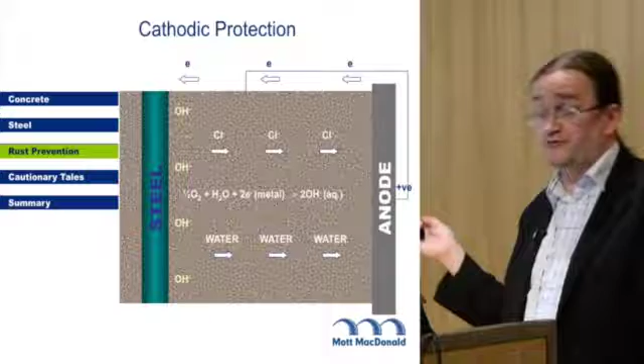The standards for CP that have been kicking around - that one's been around 15 years now, that one's coming up to 10 - cover the people doing it: the designers, the installers, the people taking any kind of CP measurements. All the contractors have got well on board with this, and so people doing CP on site are actually trained and competent. The Highways Agency have an advice note, and the Concrete Society have guidance on it.

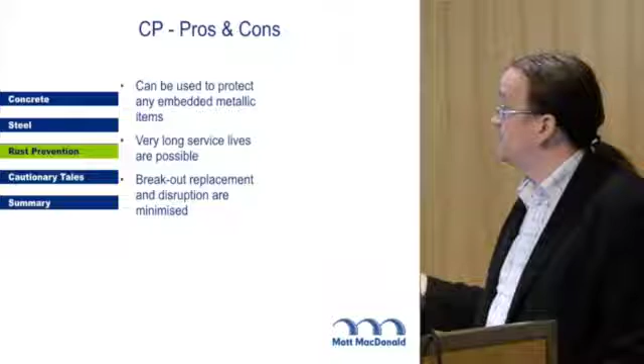We can use it to protect any embedded metal of any type. We can get very long service lives. We need impressed current to do that, and you need to keep an eye on it to make sure nobody's turned the power off. And it cuts down on the extent of repair. It doesn't work through air gaps, so we can't CP a lamppost above ground, because electricity through air is called lightning. We need to worry about stray current, but that's a design issue and is fairly simply dealt with. And sometimes we've built something that we can't CP.

Inhibitors, basically mystic goop - clear, colourless, painted on, soaks in, stops the rust. It sounds ridiculous, it sounds too good to be true, but it does work, and lots of things have inhibitors in them. If you ever used to fix anything on your car that was built in a factory in the 60s and 70s, the bit you got to replace it with was wrapped in brown paper. That brown paper contained an inhibitor to stop it rusting on the shelf.

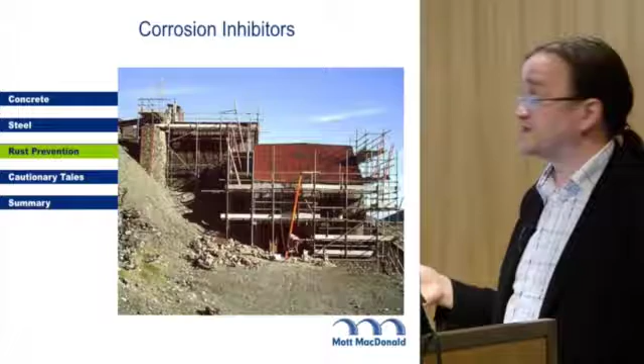This is Force Crag Mine in the Lake District. It was owned by the National Trust. It was repaired in 2004, and being a heritage property, they wanted it fixing but not looking like it's been fixed. So we can't fix the steel by painting it, because then it wouldn't look rusty. So what we've done is put an inhibitive wax on it. It's clear, it's see-through - what you can see is not the colour of the wax, it's the colour of the steel before we coated it. And on the embedded columns that were there, we've used Sika's corrosion inhibitor to soak in and deal with those parts.

Fundamentally, there is a perception that things don't fall down. And largely they don't, but occasionally they do. Williamsburg Bridge - fantastic huge bridge with a really cheap budget, which turned out to be complete gibberish. Costs went through the roof, program went through the floor. I'm sure anybody working in construction is completely unfamiliar with these scenarios.

In order to save money, it's a dirty great suspension bridge - in order to save money, they decided not to galvanise the individual wires that make the main suspension cables up. Now, as cost-cutting measures go, that was a fundamentally stupid thing to do. And as a result, the main suspension cables were breaking within 10 years. Individual wires were failing - there's about 8,000 of them in a main cable, so one or two falling out the bottom ain't great. But if it's happening in 10 years' time, you know you've got a structure that's suffering.

In 1987, the local authority who look after it were presented with a report that basically said there's a 5% chance of it failing, and failing involves 6,000 vehicles ending up in the river. As a local authority engineer, when this lands on your desk, you're not going to sleep well that night.

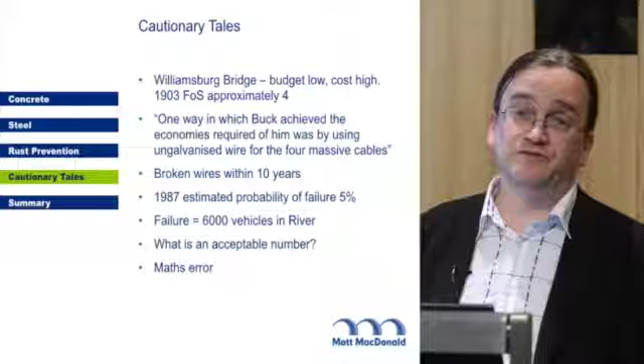Fortunately, in this case, it turned out there was a problem with the finite element modelling they did. There was a maths error, and actually it wasn't anything like that. But that's the Williamsburg Bridge. The main cables, they saved money on by not galvanising.

Closer to home, Pipers Row, lift slab car park in Wolverhampton. A lift slab car park fell down during demolition, so everyone went, phew, that was lucky. Any more kicking around? Yes.

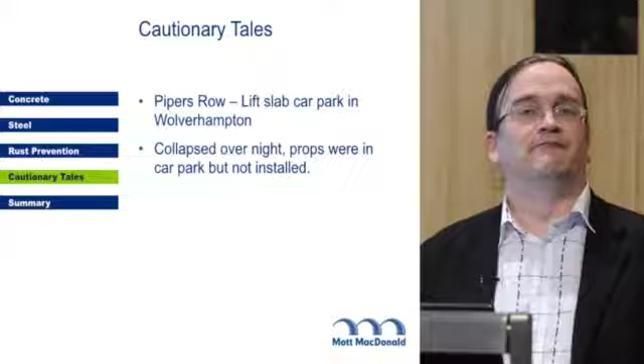Problem. Start doing some assessment, start doing some analysis. Keep the car park open because we want money from the car park. The designers, the inspectors, the assessors did a load of tests, identified that it would have problems and it would need propping. The props were in the car park, in storage, the night it collapsed and was still being used as a car park.

It's a difficult sell that it's going to fall down. But at some point, you need to make that sell. You may find yourself in a position where you have to say, look, I know it hasn't fallen down yet, but it's going to fall down and I can't tell you when.

Where they found out about it? Basically, people driving over the bridge rang the police and said, I came over here last night and I'm sure it was a lot smoother than this. Is it all right? So they end up going down, doing an investigation, and yeah, it's 2 foot lower. What do we do? Well, to be honest, replacing the piles is a tricky operation.

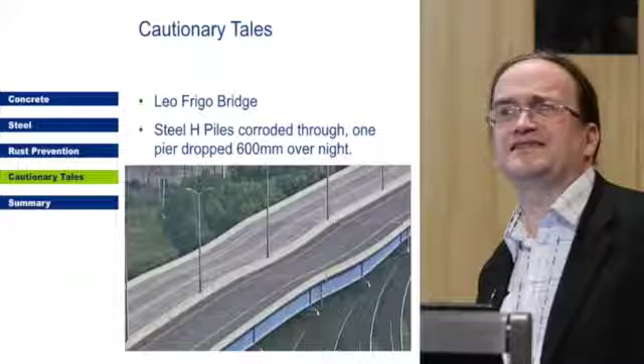So it does happen, and of course, there are bigger examples of it, and again, they're still in the States. And again, this was being repaired at the time. It's the I-35 collapse, and as a result of this, they did a big study showing how many bridges are suffering in the States. They're substandard, so they're code failures, which means they don't meet what we expect of a bridge now. Doesn't mean they're going to fall down now, doesn't mean they're going to last 100 years.

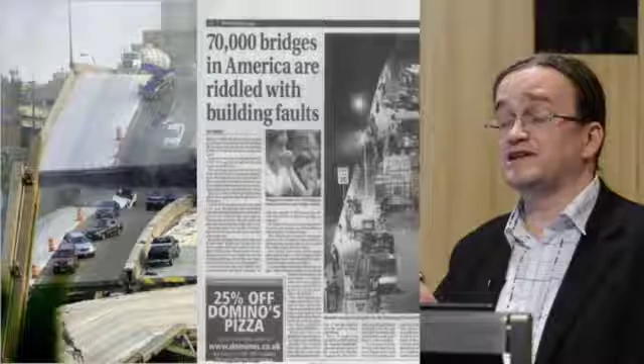If you go into America on holiday, there is a website that points out where the substandard bridges are, so all you need to do is avoid them, and you'll be fine.

Basically, things to remember. Number 1, steel rusts. That's what it wants to do. And we can stop it. Easiest time to stop it, design stage. Then we're looking at paint or cathodic protection or inhibitors or concrete.

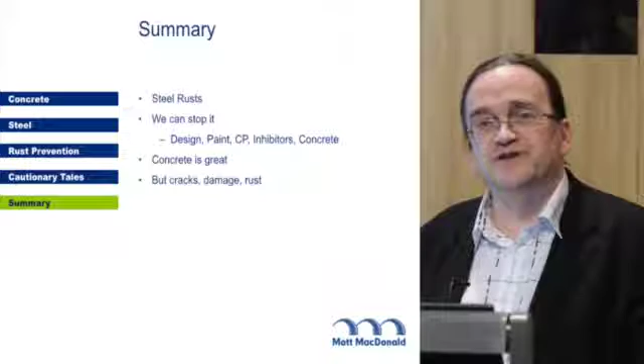Concrete's great, but it cracks. It gets old, it gets damaged. Steel rusts, so it needs repair. And in order to repair it, we find out what's wrong with it. And then we fix it. We don't just rush out and gob stuff over the holes because somebody said it's great. And if you do it that way around, you can do a durable repair.

It's all part of asset management, but fundamentally, bottom line is things will fall down. That's basically it for me.